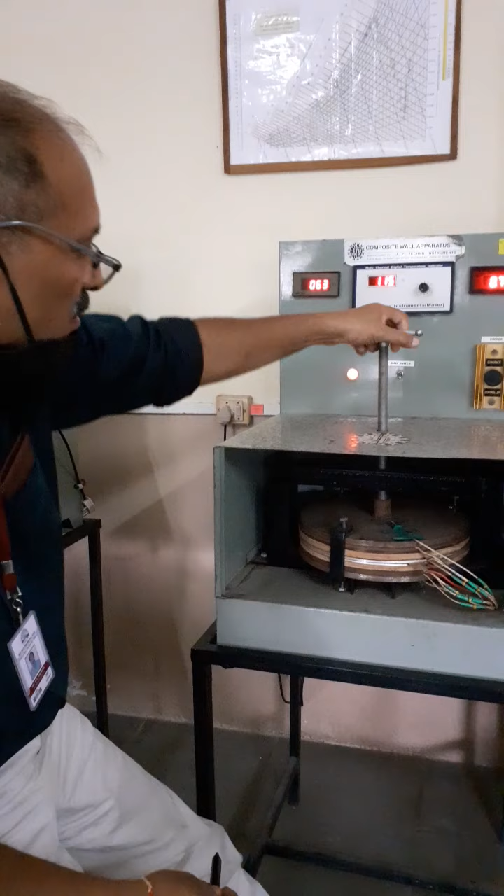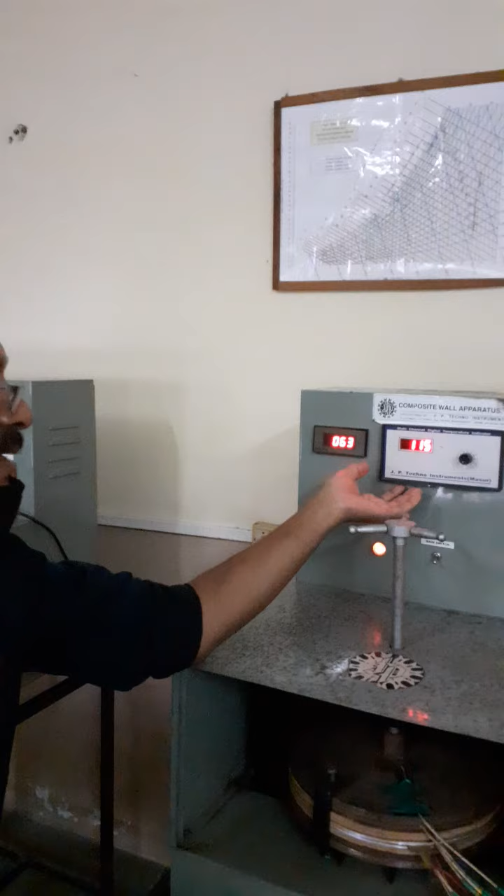If you just come upwards, there is a lever which is used to minimize the air gap in between these particular layers. If you come a little ahead again at the top, we will see there is a voltmeter, there is a temperature indicator, there is an ammeter, and again there is a dimmer stat.

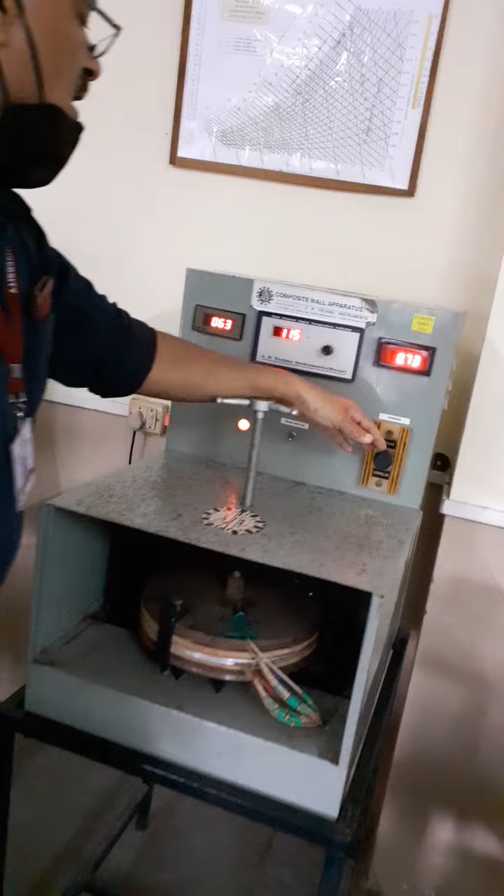This dimmer stat is used to vary the current flow, and because of that the heat which is generated, as per the formula Q = VI, is getting varied. This temperature indicator is fitted with 8 probes. This is a multi-probe temperature indicator which is having 8 temperature probes fitted in this particular slab. That is T1, T2, T3, T4, T5, T6, T7 and T8.

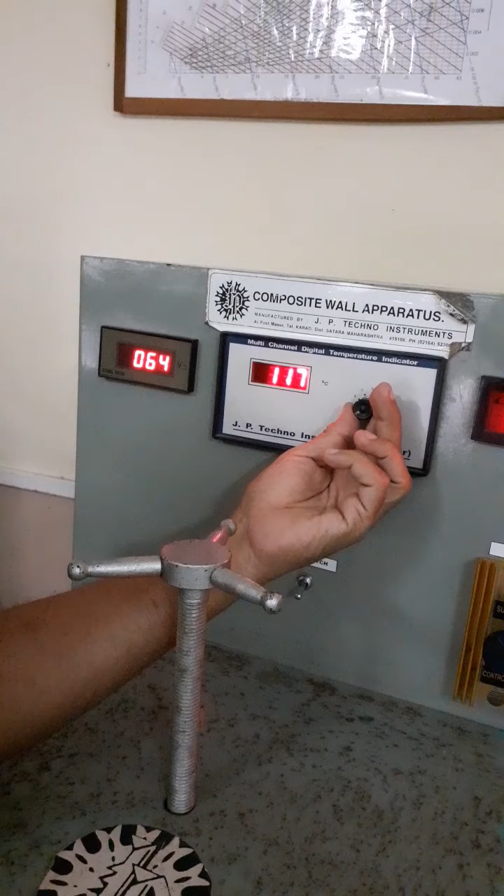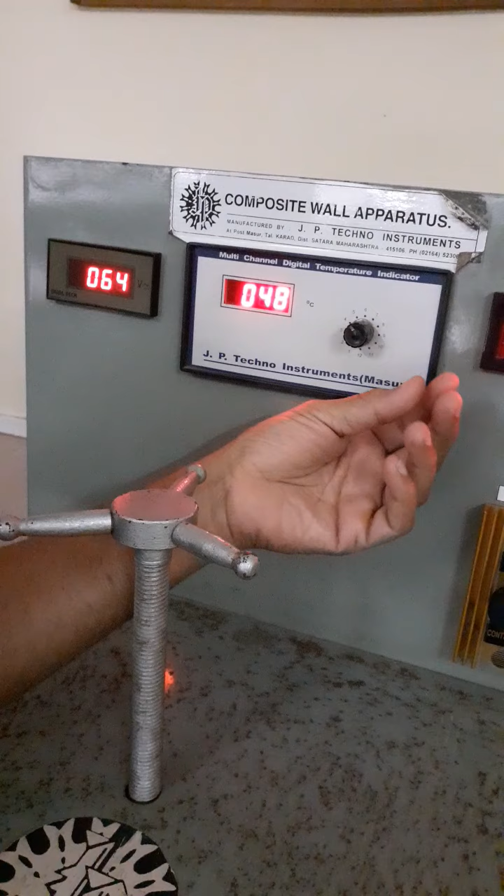You see, this particular knob is operated at the temperature indicator, now it is T1. T1 is indicating 116 degrees Celsius. T2 is indicating 117 degrees Celsius. T3 is 69 degrees Celsius. T4 is 66 degrees Celsius. T7 is 48 degrees Celsius. T8 is 46 degrees Celsius.

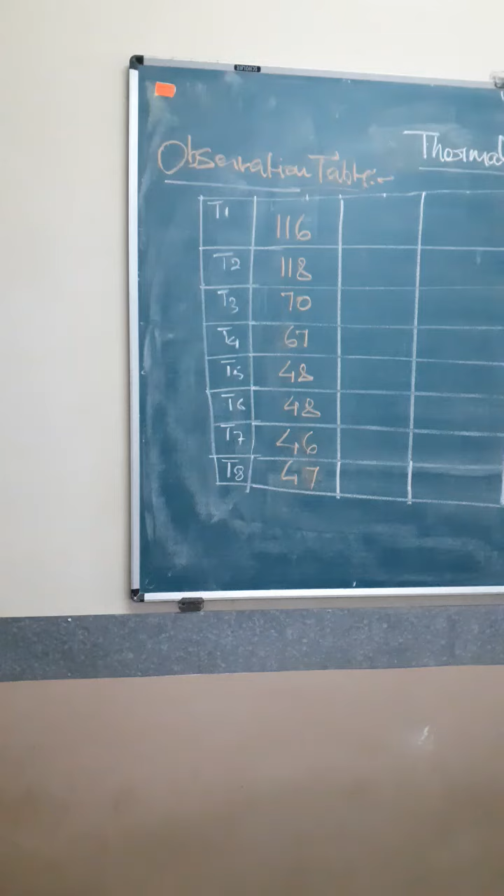Okay, so again after 5 minutes we are recording the temperatures. T1 is 118, T2 is 120, T3 is 72, T4 is 68, T5 is 49, T6 is 49, T7 is 47, T8 is 46.

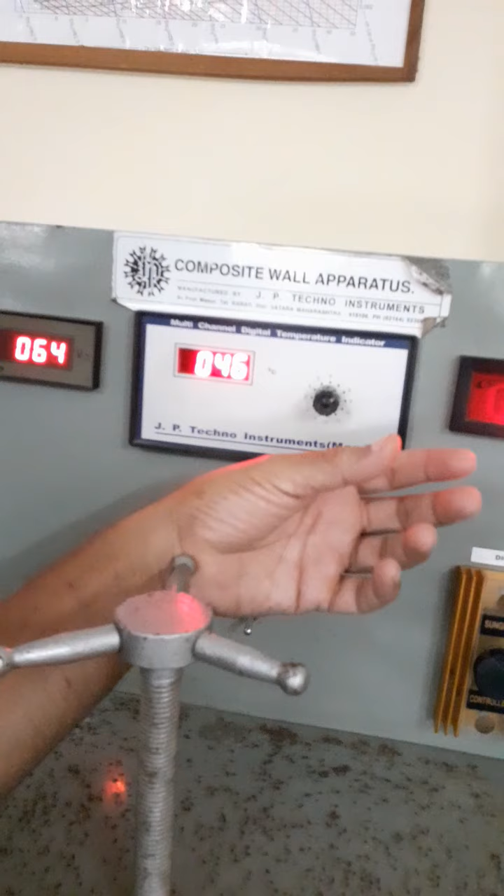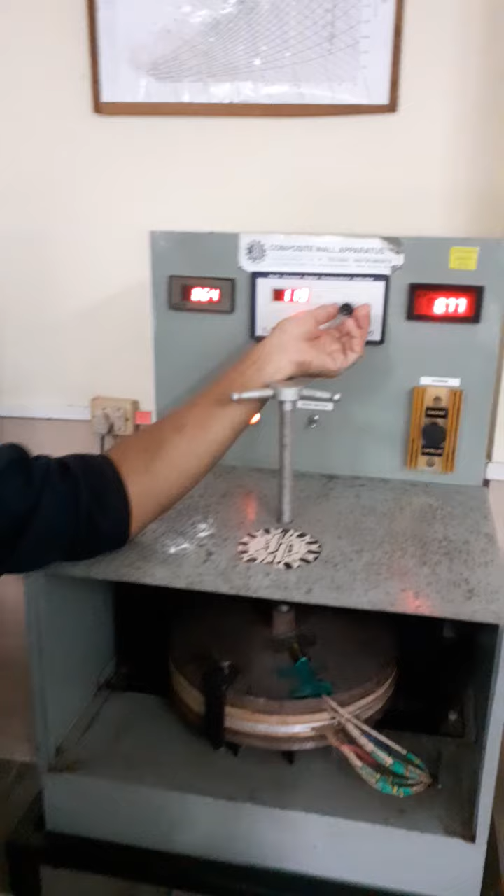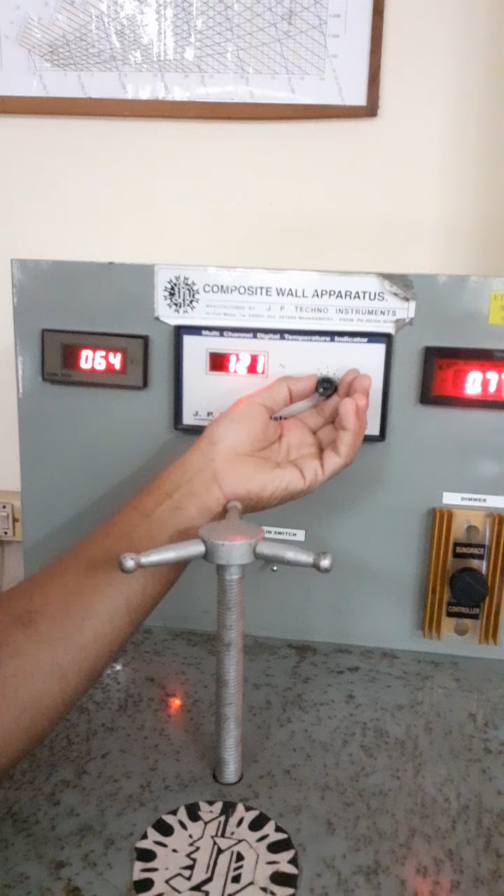Again after a 5 minute gap, we see that T1 is coming 120, T2 is 121, T3 is 72, T4 is 69, T5 is 49, T6 is 50, T7 is 47, T8 is 47.

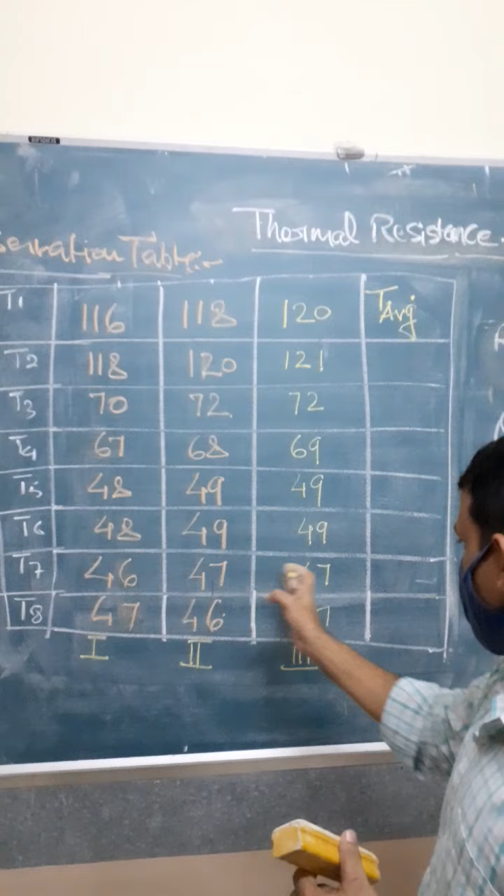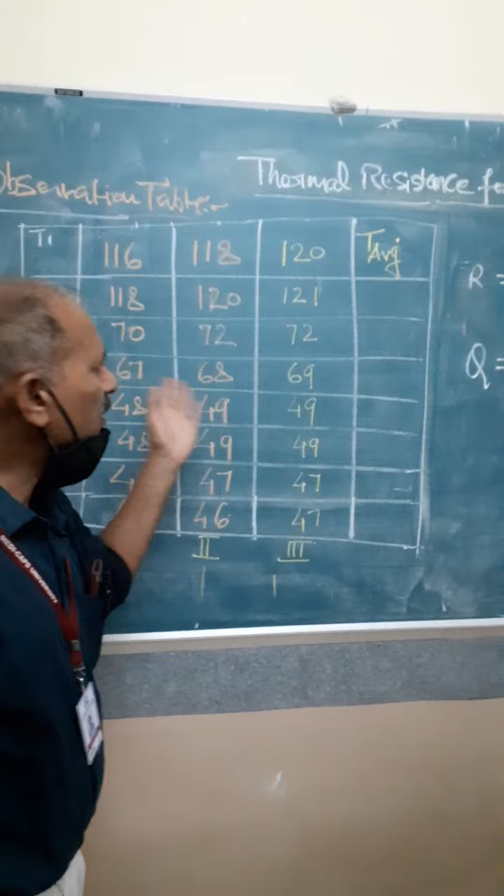No, we can take these two readings separately as reference, or we can take the average of that. We can take the average of all. So we can do those.

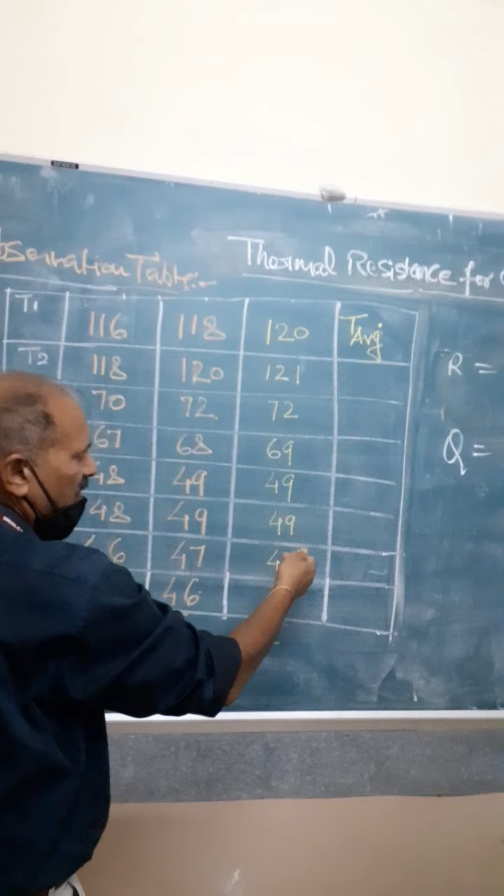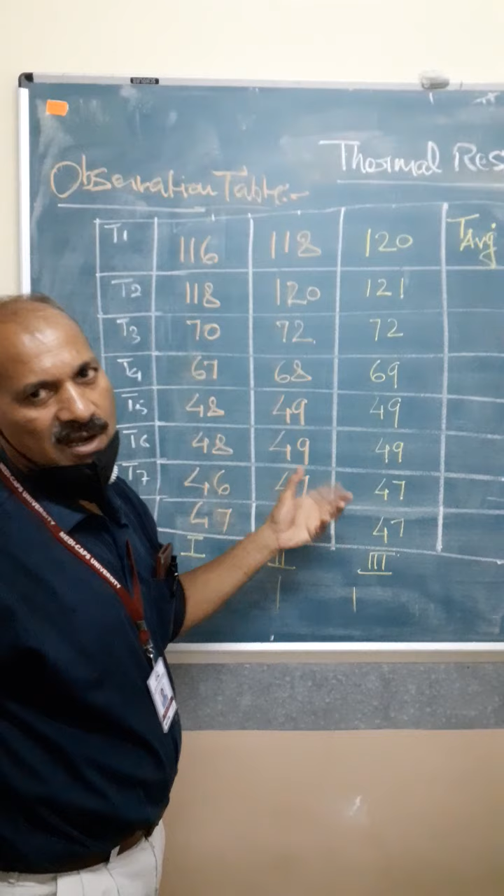So you find that we have recorded 3 readings, 5 minutes apart. That is readings 1, 2, and 3: T1 through T8, again after 5 minutes recorded. We see that the temperature variation is very negligible. It means we can consider that this condition is almost a steady state condition.

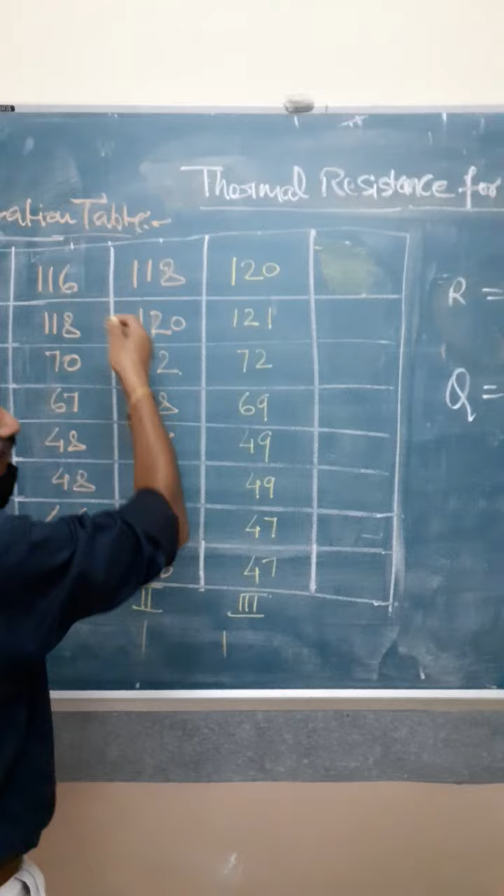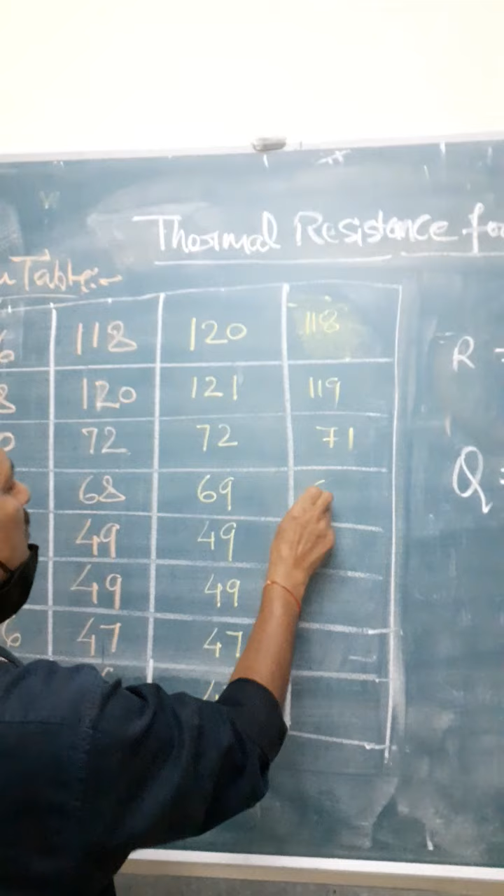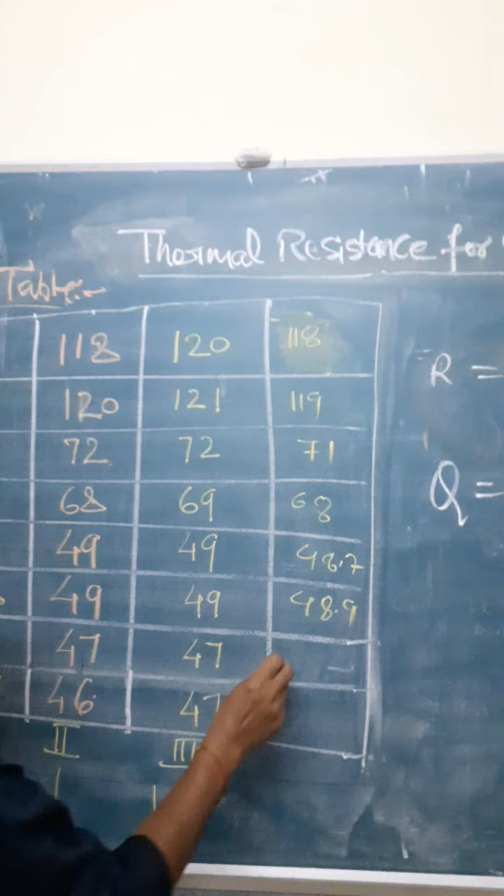Still, we can take the average of all these three and find out the average T1, which is coming approximately 118. Similarly, this will be coming 119, this almost 71, this almost 68, this 48.7, this 48.9, this 46.8, and this 46.8 approximately. So this is your temperature.

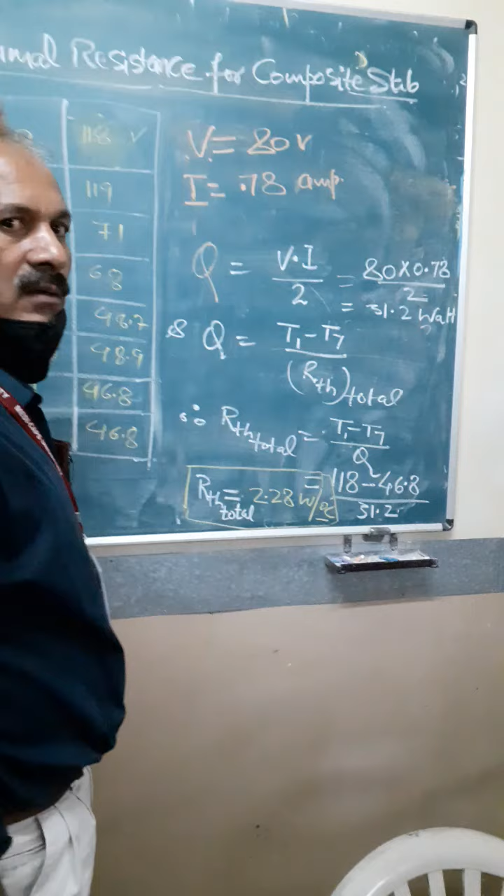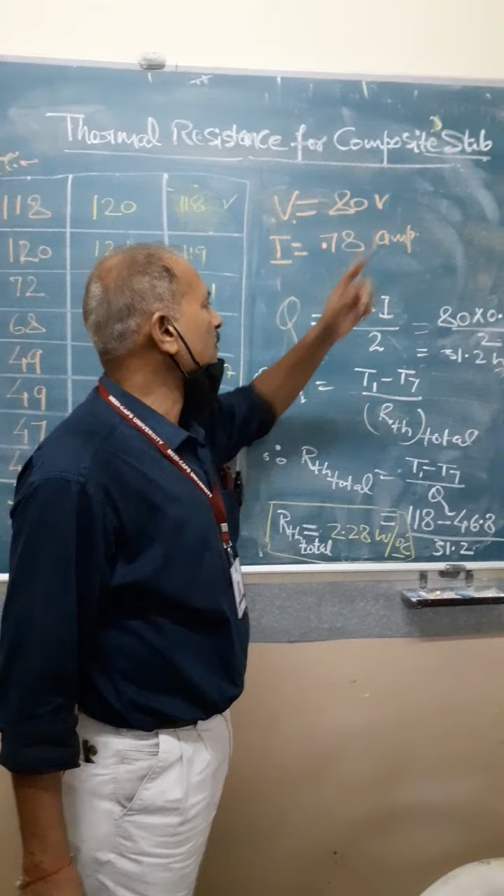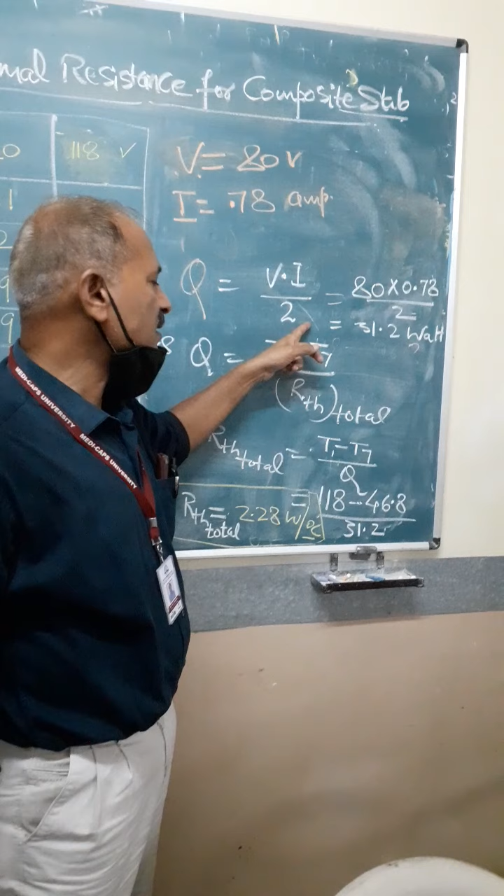Now, based on this recorded data, the voltage is coming 80 volts, and the current measured is 0.78 ampere. With the help of V and I, we can calculate VI by 2, which is 31.2 watt. And why have we divided by 2? Because half of the heat is flowing upward and half is flowing downward. So 31.2 is equal to T1 minus T7 by R thermal,

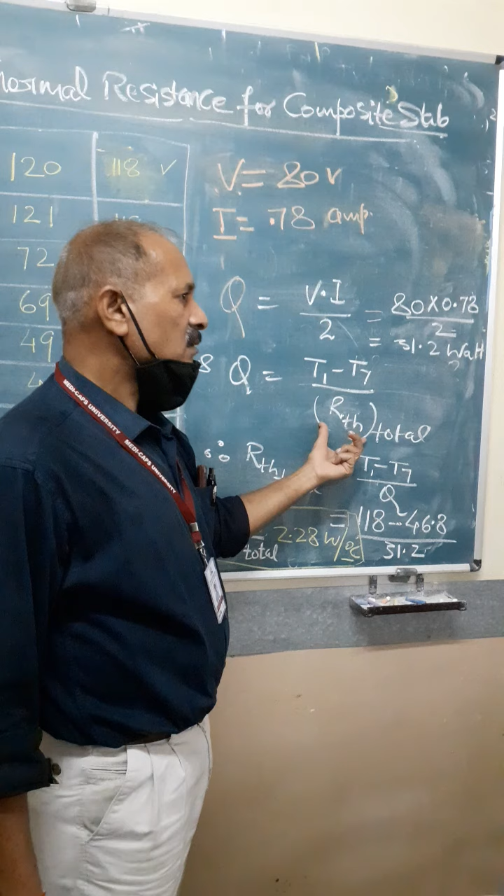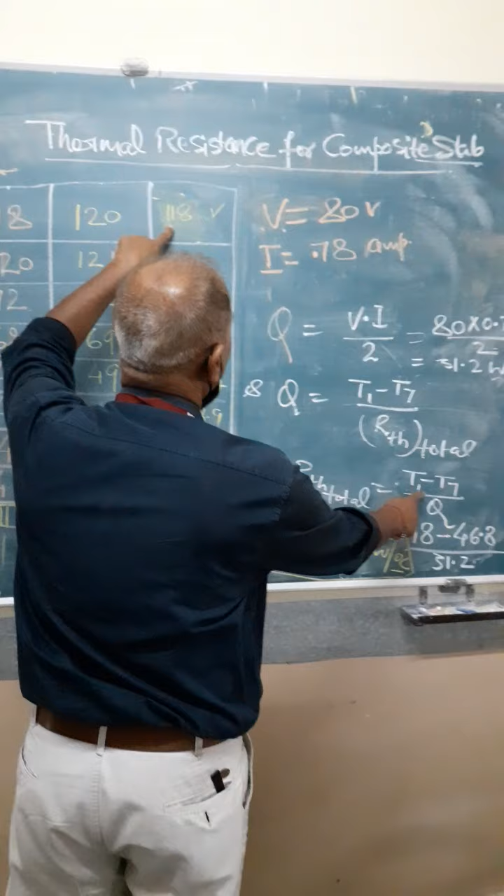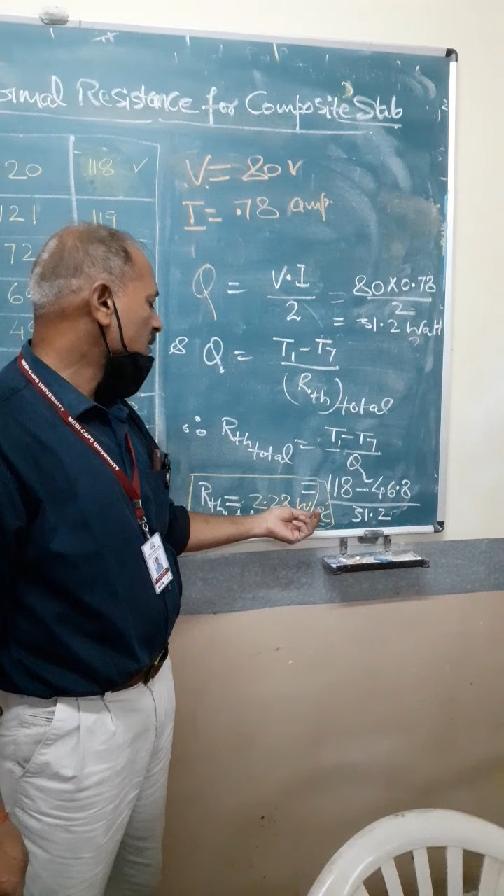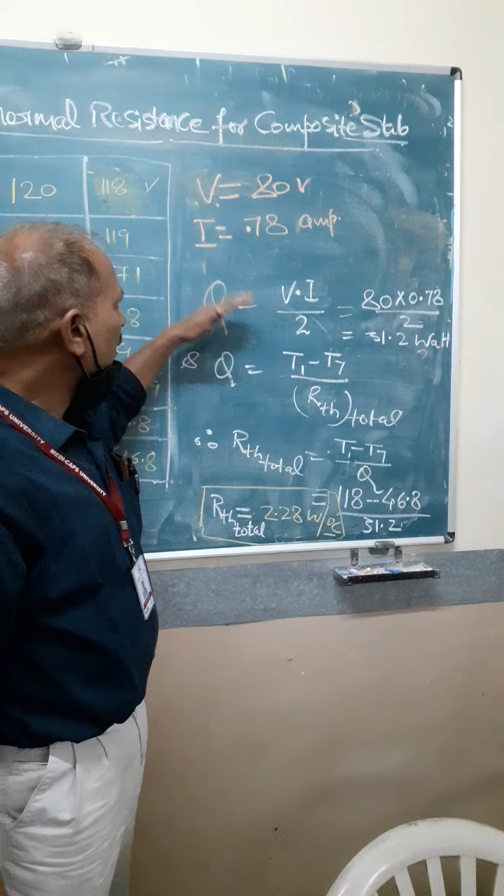that is the thermal resistance. So thermal resistance is equal to T1 minus T7 by Q. T1 is 118 and T7 is 46.8, divided by 31.2, which is coming to be 2.28 degree Celsius per watt. So this is the thermal resistance measured experimentally. With this experiment, we conclude that the thermal resistance of this composite slab is 2.28 degree Celsius per watt.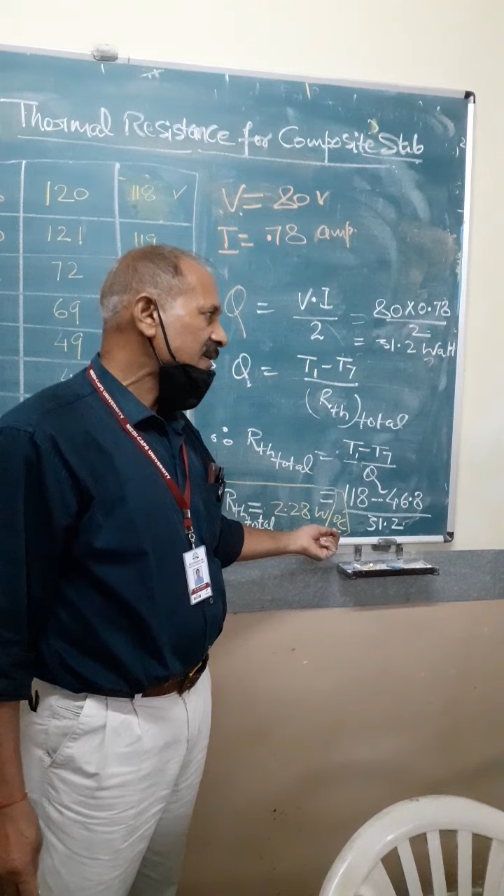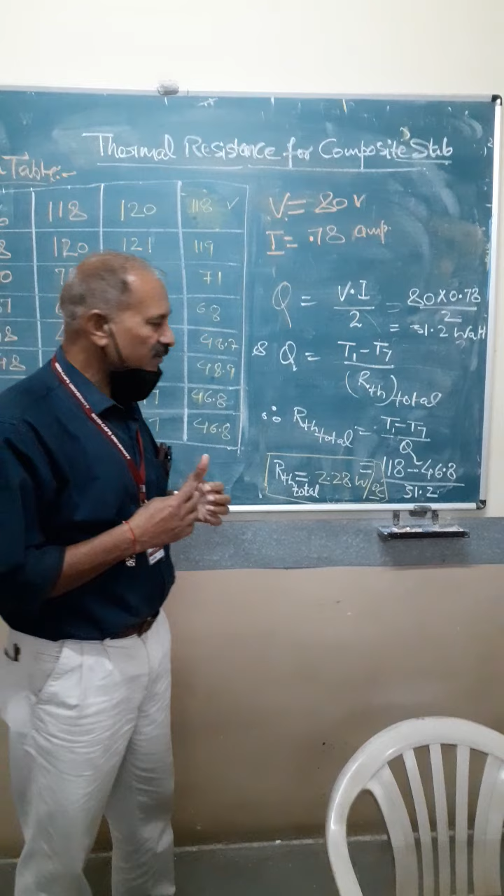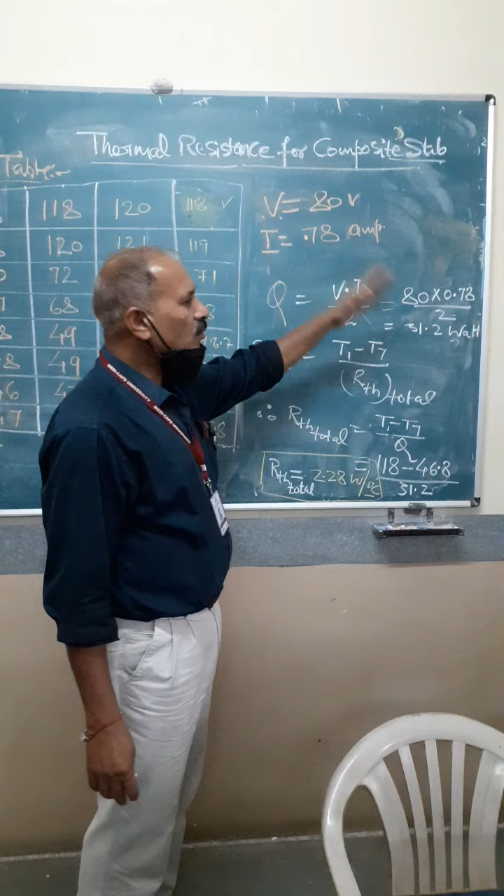Similarly, by using the theoretical formula, we can calculate the thermal resistance, and then see how much deviation is coming and what the reasons can be. That will be the conclusion of this experiment, and we'll try to find out how to minimize this deviation. This becomes the conclusion of this experiment.